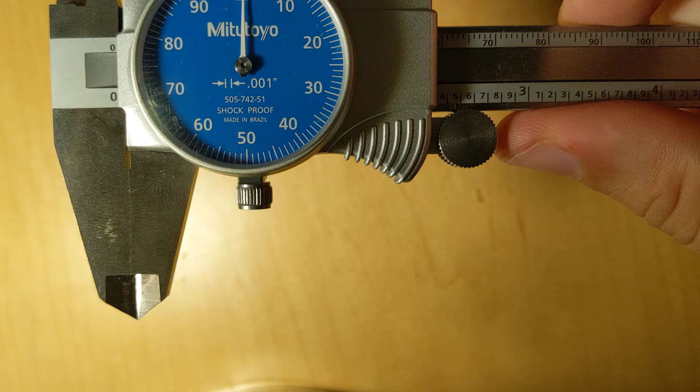This is a video to show how to properly measure anything using a dial caliper.

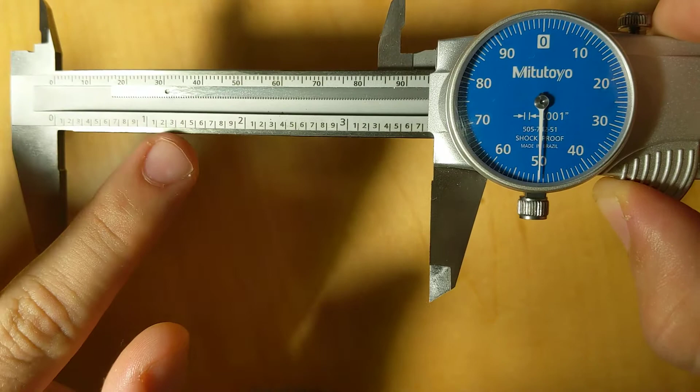So a dial caliper has the inside diameter jaws, outside diameter jaws, and the scale right here. This caliper is in inches. Big numbers are inches, so one here would be 1 inch, 2 inches, 3 inches. A small number is going to be your first decimal, so 1.1, 1.2, so on and so forth. Second and third decimal on the dial. The dial is always going to tell you the accuracy of the caliper. In this case, each space here is 1/1,000 of an inch, 0.001. This is a Mitutoyo caliper, Japanese brand made in Brazil.

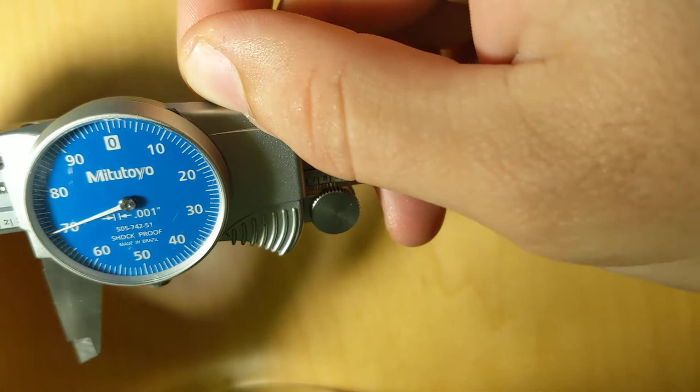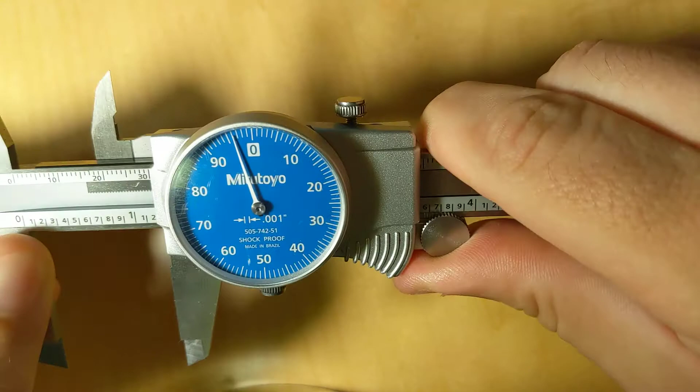And this here is the locking nut, the locking screw. So basically when you lock this screw, once it's locked right here, you can't really move the dial back and forth. It only takes a quarter of a turn to unlock and lock it. You don't have to go crazy with this. I've seen many people completely removing the screw here. You don't really need to do this. As soon as you feel it's tight, it's already locked. You don't need to do anything else. A little bit loose, it's unlocked, and you can move it back and forth.

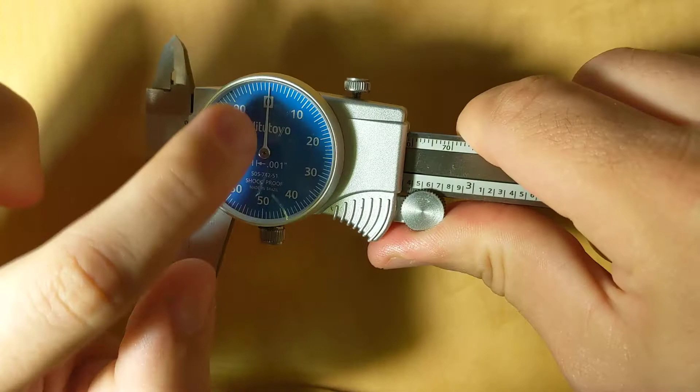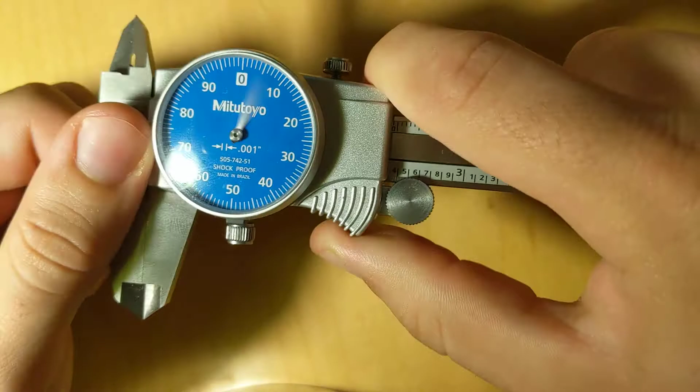This one here is the bezel nut, and this screw is for locking the dial. So when you close your caliper, this is the very first thing you need to do when you're measuring. When you close it, the needle should be lining up at 0. If it's not, you undo this screw right here, then the dial is unlocked, and you can adjust it to 0. Once it's adjusted at 0, you lock the dial. Once it's locked, you can't move it anymore. And then you're ready to start measuring, okay?

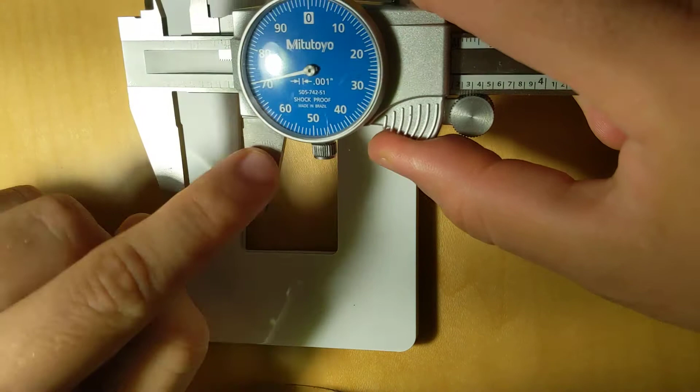Whenever you want to measure something, make sure you're always using the center of the jaws. Try not to use the tip of the jaws. You're always going to get a better measurement if you're using the center. So you open up the caliper, you close it on the part you want to measure. Make sure the center of the jaws are hitting the sides, not the tip, but the center. In this case, we have 3 inches, right? So the big number is your inch number. And then you have 3.1, 3.2, 3.3. So we're between 3.3 and 3.4 of an inch.

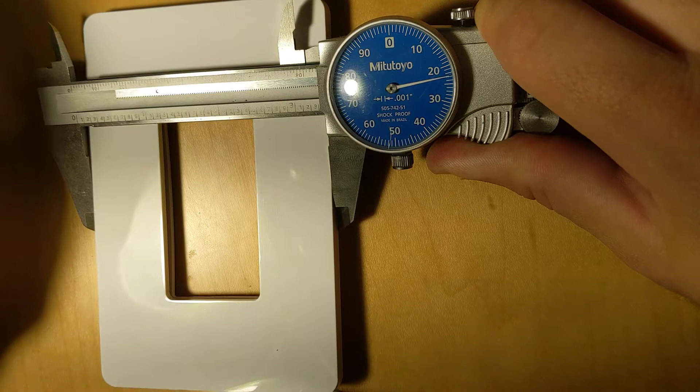So the first decimal is 0.3 right there, so 300 thousandths of an inch, 3.3 plus 23 thousandths of an inch right here on the dial, second and third decimal. So 3.3, 23, and that's your final measurement.

This would be for using the outside jaws, the outside measurement jaws, for external measurements. For internal measurements, you can use the internal jaws right here. Same idea, try not to use it right on the tip, try to use the center of the jaws, but make sure you never go in this portion here, because when you close the caliper, it lines up where the jaws hit each other. So make sure you always measure from these points here, never from the internal portion of it, okay?

So when you slide it into your internal measurement, in this case we would have 1 inch plus 0.3 of an inch plus 0.004. Let's not forget that each increment, each space, is 1 thousandth of an inch, 0.001. So in this case we have 1.304. It's not 1.340 because each space right here is 0.001 of an inch. So your total measurement in this case would be 1 inch plus 0.3, 1.304. That's your final measurement.

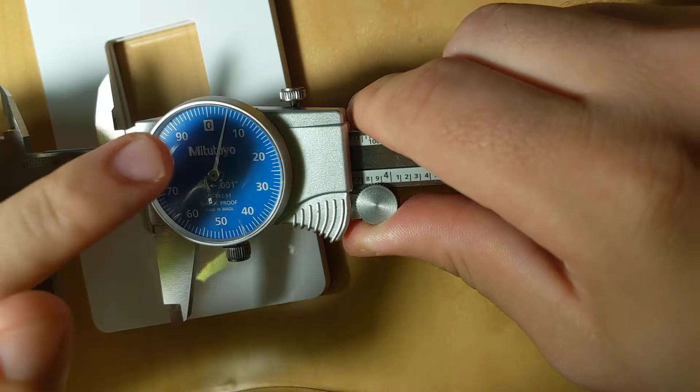If you were right here, it would be 1.300 right on the dot. So make sure you always notice where the needle is located, if it's over the 0 or before the 0. If it's before the 0, the number you're seeing is not going to be your first decimal, it's going to be the number right before it. In this case, let's say right here it would be 1.2 something, and in this case here, 1.3 something.

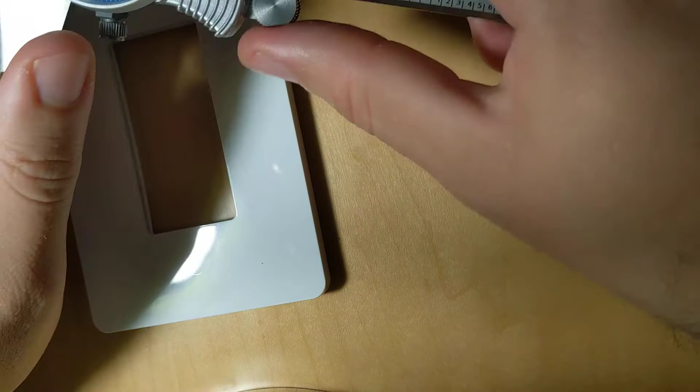On the caliper, you also have the height gauge. So let's say we wanted to measure the depth of this part right here. You can also just drop the caliper down like this. You notice the tip here when it's at 0. Let me open up my image here for you a little bit. So when it's at 0, there's nothing pointing out right here, but when we open it up, it sticks out here. So that's how you would measure the height, for example. Make sure your part's nice and flush, then you drop it on the caliper, and then you can check the depth of your part.

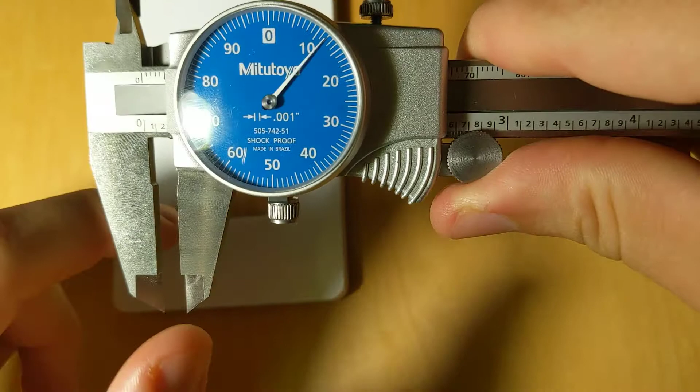So this would be, in this case right here, 0.282 or 0.283 in depth. And that's basically how you use a dial caliper. There's no trick, it's just a matter of getting used to it.

So just to recap, make sure you always check the first big number. This will be your inch number, 1, 2, 3 inches. The first decimal will be the small number, so in this case you would have 3.1 something, somewhere between 0.1 and 0.2. So 3.170 in this case, and that's basically it.

This also helps a lot, this little clamp screw here, it helps a lot to go smooth when you need to take measurements smoothly.